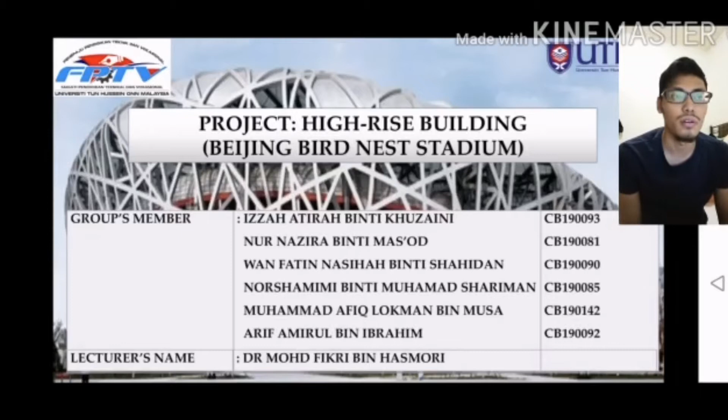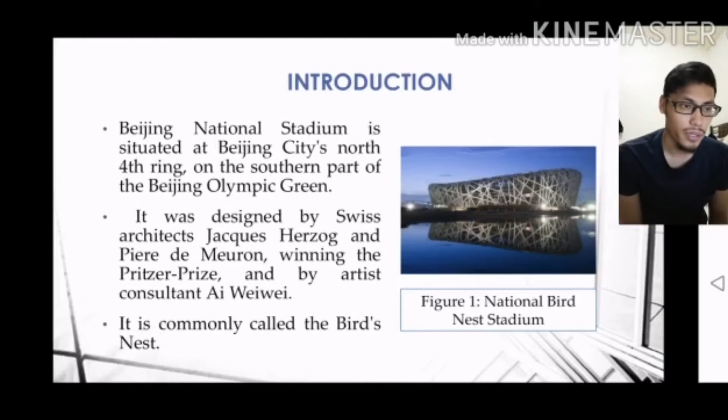So I will continue my next slide about introduction for Bird Nest Stadium, Beijing. Beijing National Stadium is situated at Beijing City's North Fourth Ring on the southern part of the Beijing Olympic Green. It was designed by Swiss architects Jacques Herzog and Pierre de Meuron, winning the Pritzker Prize, and by artist consultant Ai Weiwei. It is commonly called the Bird Nest.

Foundation system: the structure consumed thousands of tons of concrete and steel. The weight of the stadium was 110,000 tons of steel, considered as dead load. This building is supported on 38 meters of piling capable of supporting the horizontal force of the structure below the ground. The structure must be capable of resisting a vertical load totaling 56,625 tons.

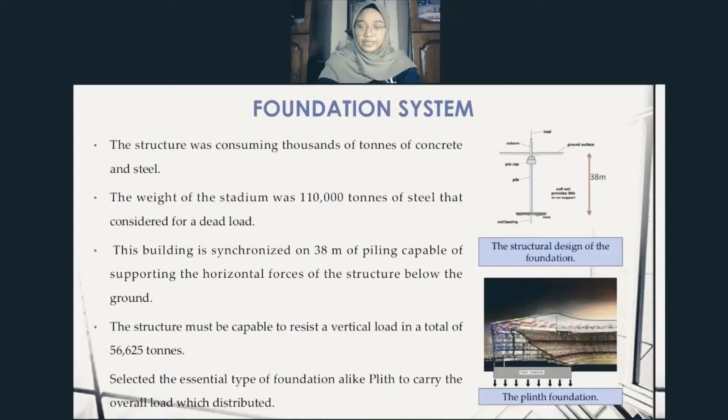We selected a plinth foundation as the essential foundation type to carry the overall load, which distributes it. The figures show the structural design of the foundation and the plinth foundation. This stadium used cast-in-situ bore pile, the most economical foundation capable of transferring high loads through the soil to deeper, more competent soil or rock stratum.

To suit the nature of the soil, the appropriate drilling tool is selected to excavate the soil on site where ground conditions are unfavorable. For the construction of bored cast-in-situ piles: first, set up and locate the pile point on the ground; second, the boring process; third, reinforcement placement; fourth, bored cast-in-situ pile concreting.

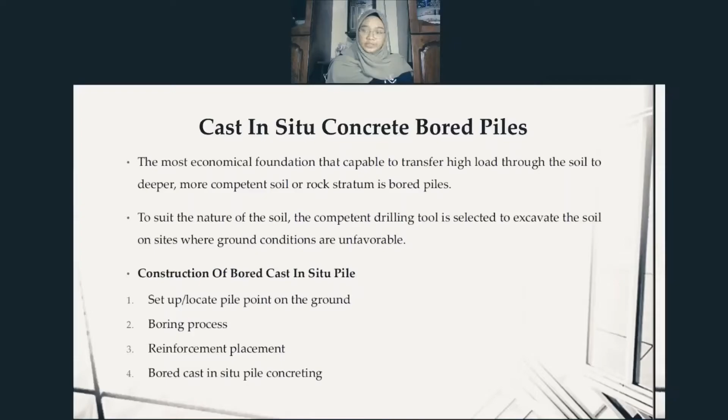Deep excavation: first is the diaphragm wall. The geometry of the primary elements forms a relationship between the supporting elements, points at ground level, and the opening roof's position, size, and shape.

The moving roof was eventually eliminated from the design, and the opening size became bigger and more closely corresponded to the seating bowl. The primary geometry was then developed into a 3D portalized space truss, enabling the roof to closely follow the architectural form of the bowl and concourse structure, rising to 60 meters and spanning the required 313 by 266 meters.

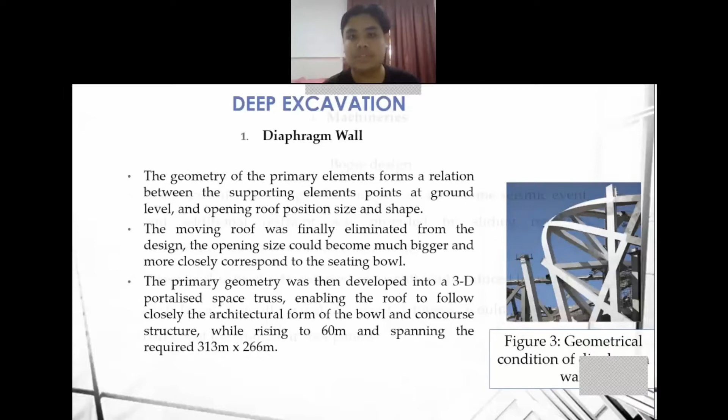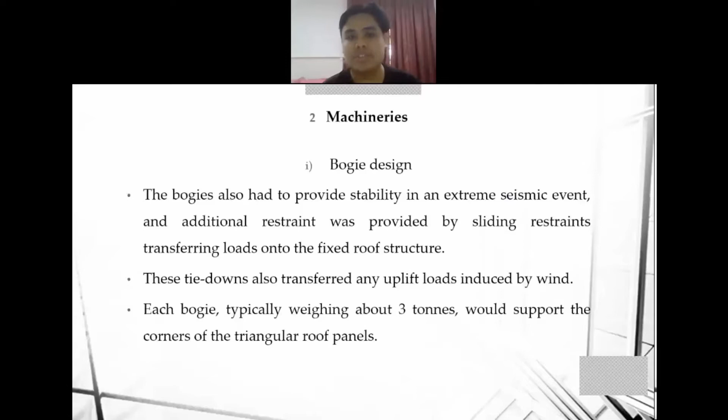The second element is the machinery. They used a bogie design. The bogies also provide stability against extreme seismic events, with additional restraint provided by sliding restraints transferring loads into the fixed roof structure. These tie-downs also transferred any uplift load induced by wind. Each bogie, typically weighing about 3 tons, would support the corners of the triangular roof panels.

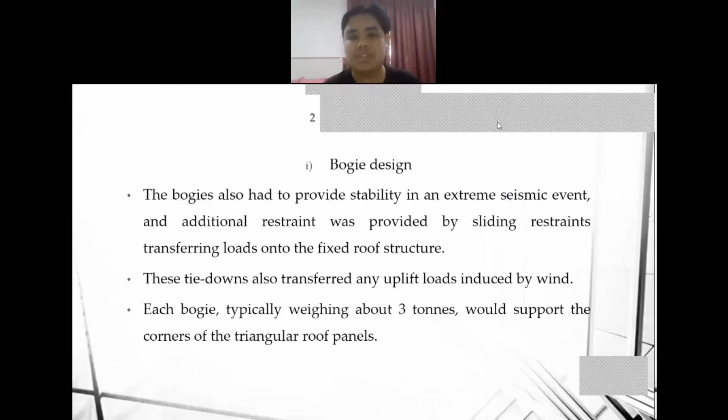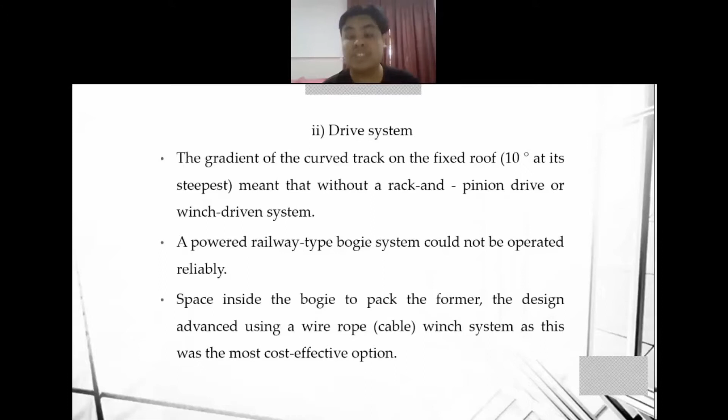Drive system: the gradient of the curved track on the fixed roof is 10 degrees at its steepest, meaning that without a rack and pinion drive or winch-driven system, a power railway-type bogie system could not be operated reliably. Given the limited space inside the bogie, the design advanced using a wire rope cable system, as this was the most cost-effective option.

Structural frame system: it is constructed with two independent structures - the first is the reinforced concrete seating bowl, and the second is the outer steel frame. The outer steel frame is constructed with a steel lattice structure, with a distance around this structure of 50 feet.

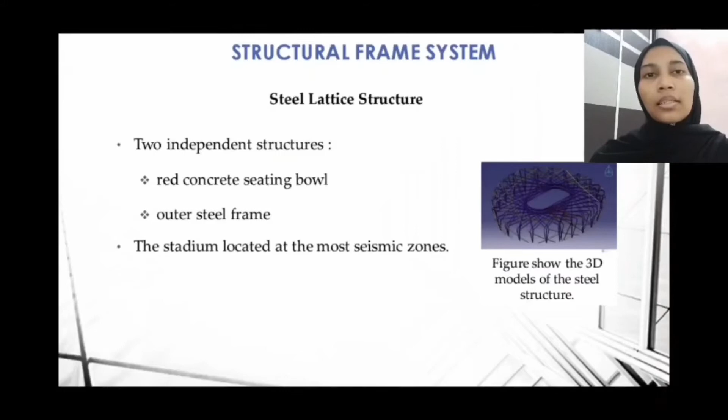The concrete bowl is the stand that holds spectators, located within the bowl. It is constructed as 8 different zones, each with their own stability system. Third, it uses precast concrete, so we can minimize the use of formwork. The figure shows the view of the stadium.

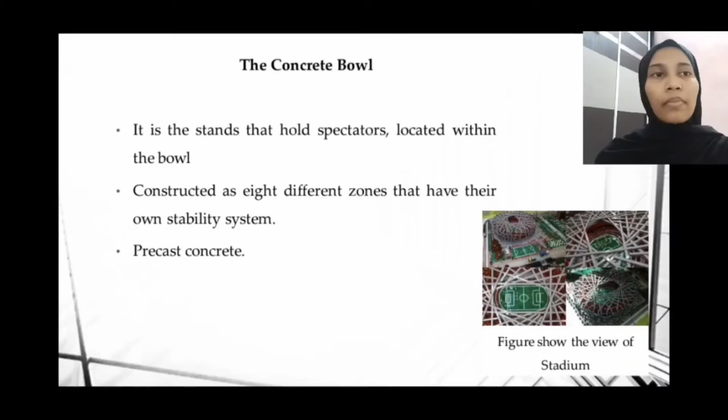For the roof, the upper part uses a double-layer membrane structure of transparent ETFE. For the lower part, translucent PTFE membrane is fitted on it, and it is also attached to the side of the inner ring.

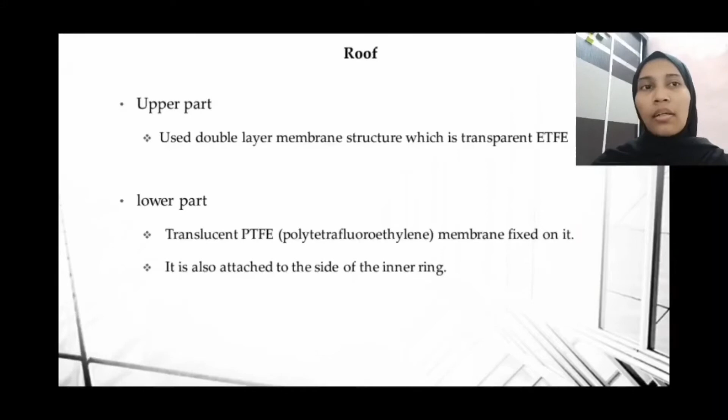Formwork system for installation of steel structure: the curved steel frames were constructed beforehand, then assembled on site, and the entire interconnected steel structure sections were welded together. The steel structure was supported by 176 hydraulic jacks during its construction.

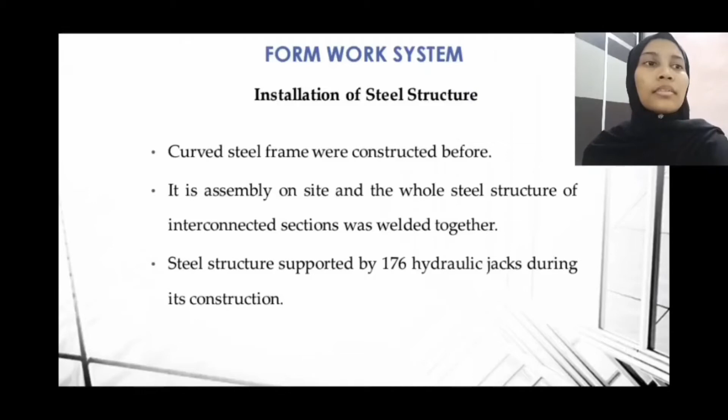Removal of steel columns: the structure stood on 78 supporting steel columns. To get rid of the columns, hydraulic jacks were used. First, the jacks would support the roof, then the columns would be removed, and the load would transfer to the jacks, allowing the structure to support its own weight.

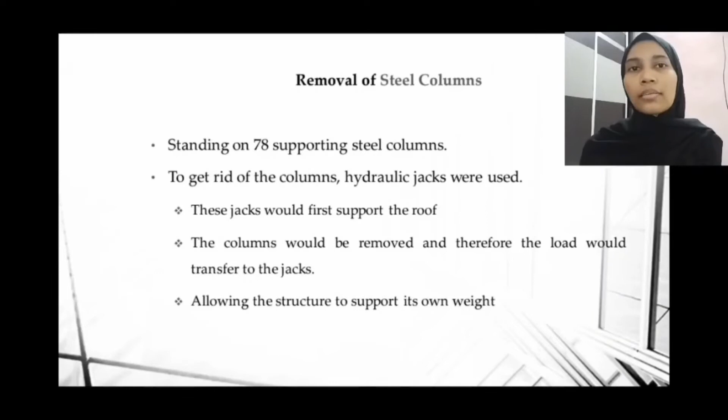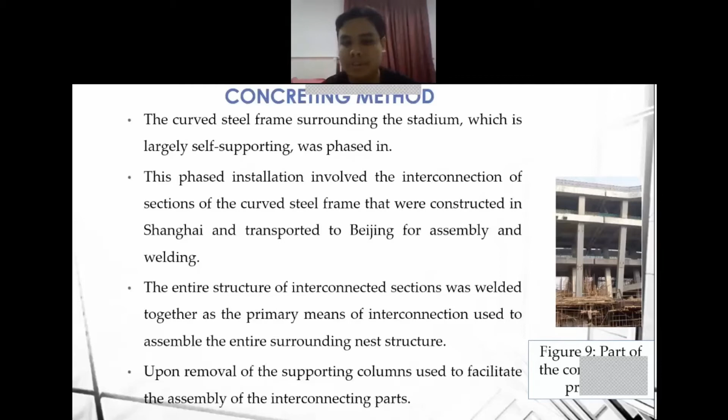Concreting method: the curved steel frame surrounding the stadium, which is largely self-supporting, was installed in phases. This phased installation involved interconnecting sections of the curved steel frame that were constructed in Shanghai and transported to Beijing for assembly and welding. The entire structure of interconnected sections was welded together as the primary means of assembling the surrounding structure, with removal of supporting columns used to facilitate assembly of the interconnecting parts.

The challenges and problems included the unusual structural form, technical limitations, and the capability of the company, along with the very long span of 313 meters, which caused the seismic design to differ significantly from that of typical tall buildings in several ways.

The Bird's Nest Stadium structure's seismic design measures that normally meet the collapse prevention goal for tall buildings under the level 3 earthquake, such as limiting inter-story drift and detailing for ductility, were inadequate.

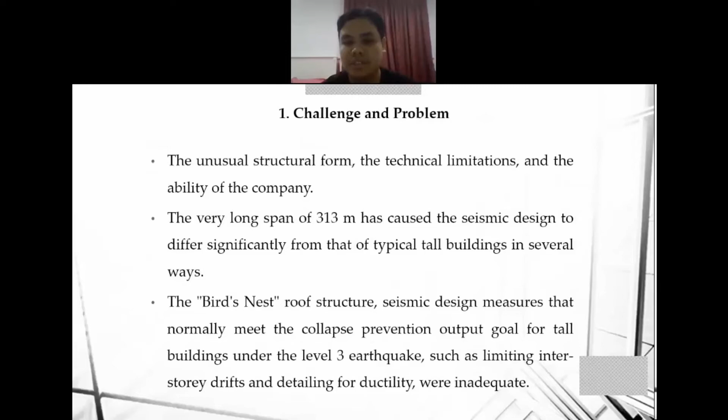Facade: this stadium has a gross volume of 3 million cubic meters and is considered the world's largest enclosed space, according to the Arup Journal. The architect has created an open facade surface to allow for natural ventilation and lighting, which is the most important aspect of the stadium's sustainable design. The facade's external surface has an inclination of approximately 13 degrees to the vertical.

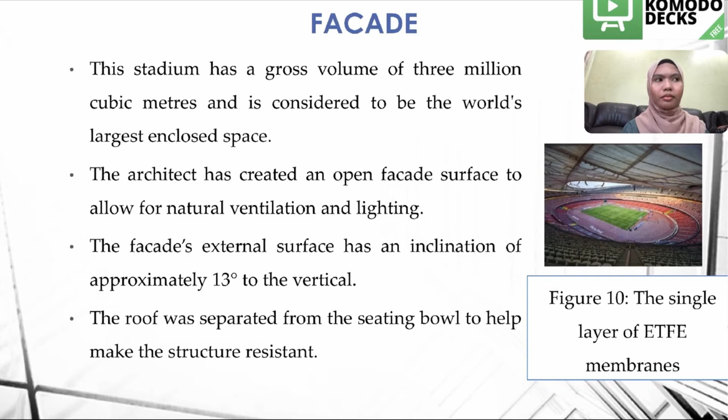The roof was separated from the seating bowl to help make the structure resistant and safe, because we know China is highly vulnerable to earthquakes.

This is wind load engineering. Rules of the International Association of Athletics Federations (IAAF) competition stipulate that information about wind speed must be available for athletics records up to and including 200 meter, long jump and triple jump. Unless the wind speed behind the runner averages more than 2 meters per second in the direction of running, the record will not be acknowledged. Measurements were therefore also made of wind speeds around the tracks, and the results presented as the percentage of time that gust wind would exceed 2 meters per second on the track, notably in the sprint and horizontal jump areas.

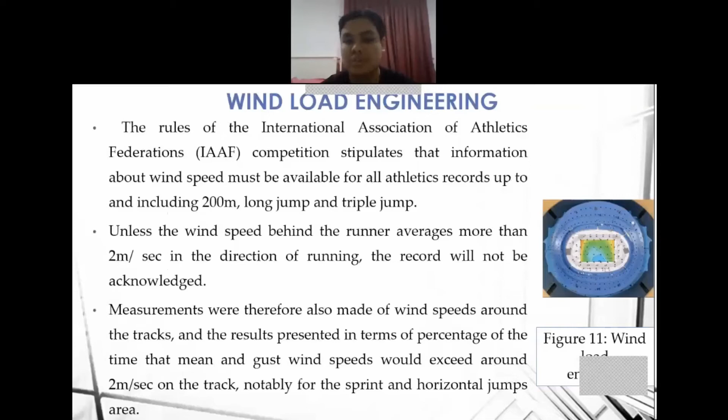Seismic load engineering is an essential design of earthquake engineering that should be used in building structures surrounded by some of the deadliest fault lines, in seismic design. The design proved that it greatly reduced damage, prevented collapse, and will also support the structure frame if the worst case concrete failure were to happen.

Third, each part of the structure was isolated so that it could move flexibly and independently during an earthquake. The structure will easily absorb the energy through its free movement rather than being broken into pieces by the earth tremor.

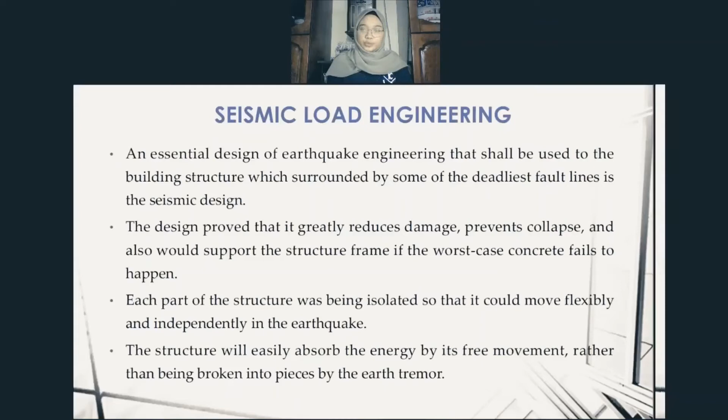For the seismic load of Birdnest Stadium in Beijing, China: the stadium was located in one of the world's most seismic zones, and advanced seismic analysis was undertaken to test the structure under various earthquake loading conditions. It is supported on a single continuous foundation system.

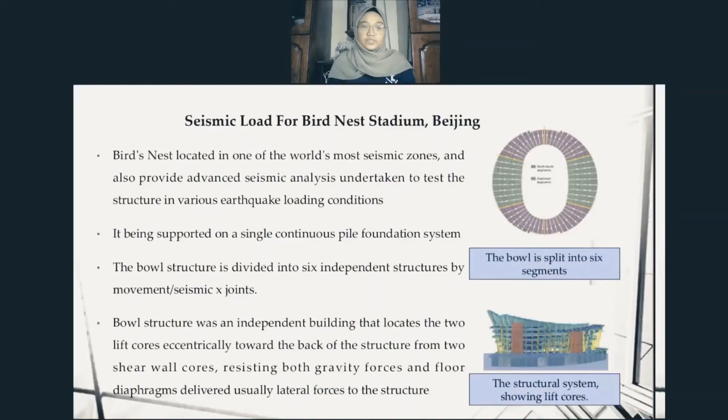The whole structure is divided into 6 independent structures by movement joints. Each was an independent building that located 2 lift cores eccentrically toward the back of the structure, with 2 shear wall cores resisting both gravity force and diaphragm-delivered lateral force to the structure.

Method of construction. First, material: 176 water-driven jacks bolstered the steel structure during its erection, while the structure was not equipped for self-support. With a precision of 1mm, the crane was fit for holding 300 tons. The water-driven jacks were released without delay to check the solidness of the arena's structure.

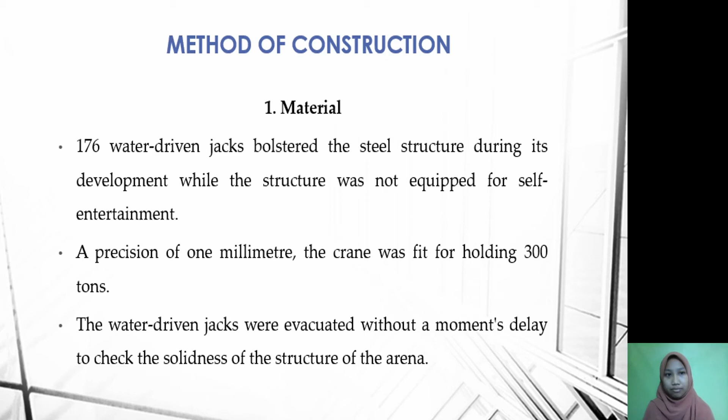Second, hoist and crane position. Steel bars were raised by 8 cranes more than 300 feet tall, lifting metal pieces as heavy as 350 tons to shape the cross-section of joined steel.

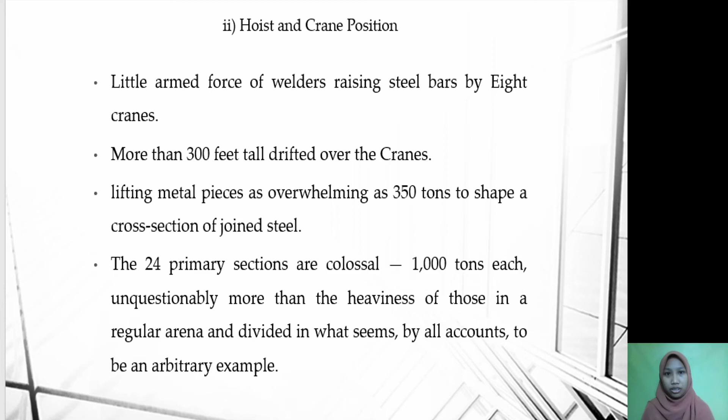Loading condition analysis and consideration. The stadium's loads mainly include the stadium's maximum occupancy of 91,000 people for the super-load. Dead loads considered during design include the burden of the roof structure, which is 42,000 metric tons. The total weight of the stadium is 110,000 metric tons.

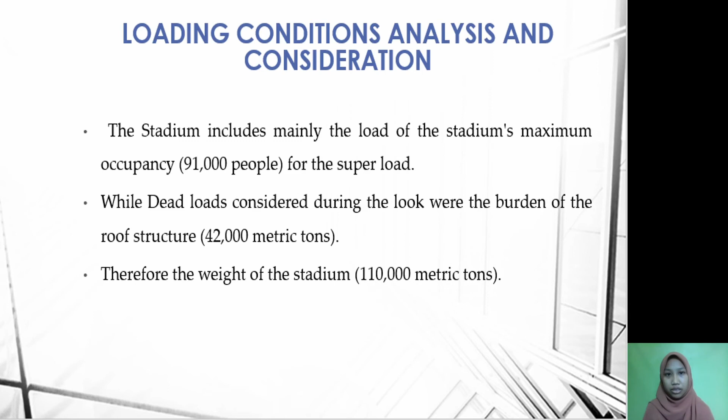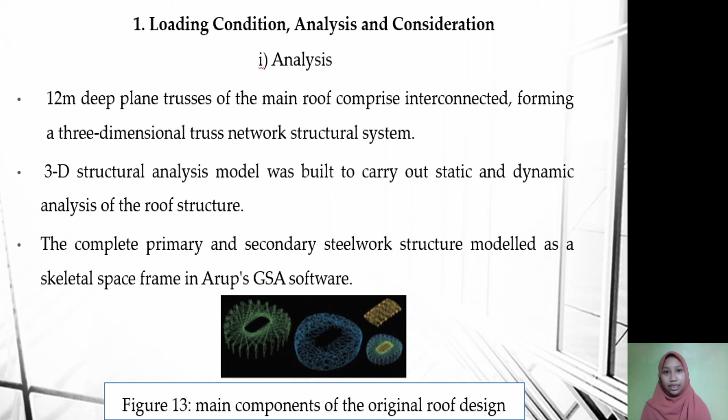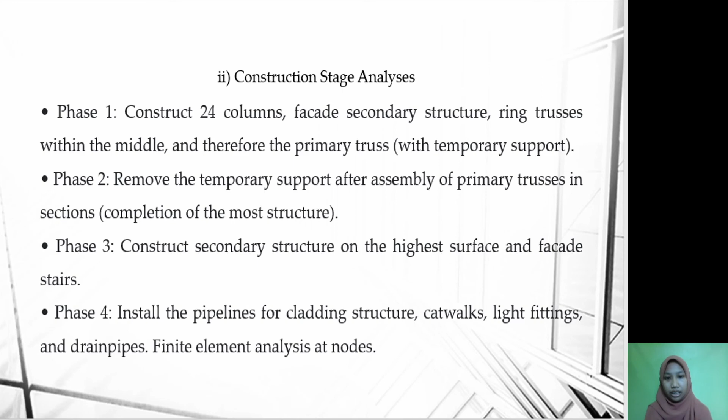Next is fire safety. As we know, the stadium is a steel structure. However, the stability of the steel decreases dramatically when temperature rises to a certain degree. So, all the seats at the upper end of the stadium are made of incombustible material, so that when a fire starts, the surface temperature of the steel will not reach 200 centigrade degrees.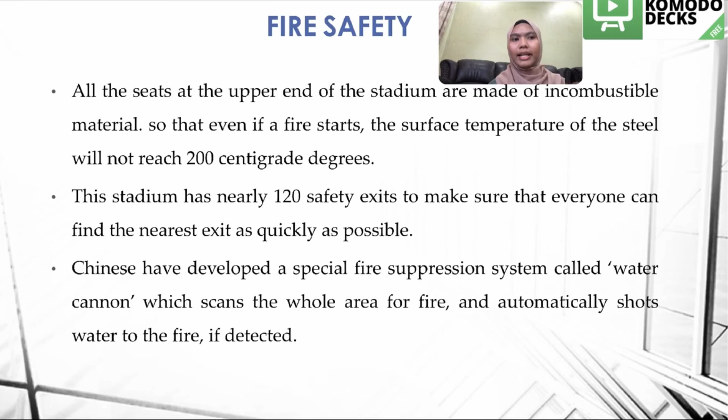This stadium also has nearly 120 safety exits to make sure that everyone can find the nearest exit as quickly as possible. The Chinese also developed a special fire suppression system called the water cannon, which scans the entire arena for fire and automatically shoots water at it if detected.

Service distribution. First, the rainwater recycling system: the National Stadium's modern water reusing framework utilizes underground pools that handle up to 100 tons of water per hour, 80 tons of which can be used for irrigating, firefighting, and cleaning in a coordinated way to lower the stadium's water utilization.

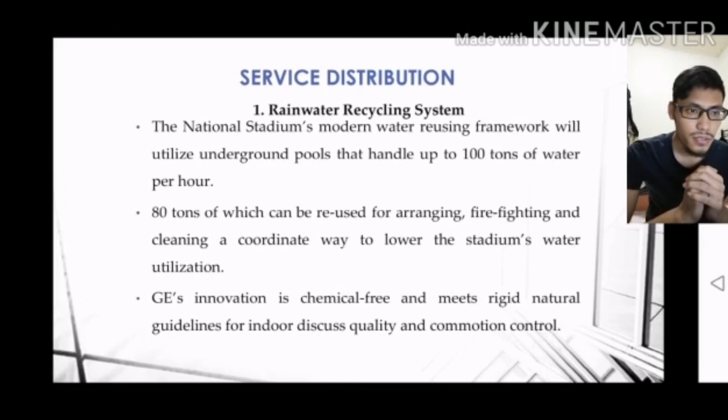This innovation is chemical-free and meets rigid natural guidelines for indoor air quality and noise controls.

Next, second: development of a multi-type wireless sensor network for the large-scale structure of the National Stadium in China. A multi-sort wireless sensor network (WSN) for structural health monitoring is created for the National Stadium in China, generally known as the Bird's Nest.

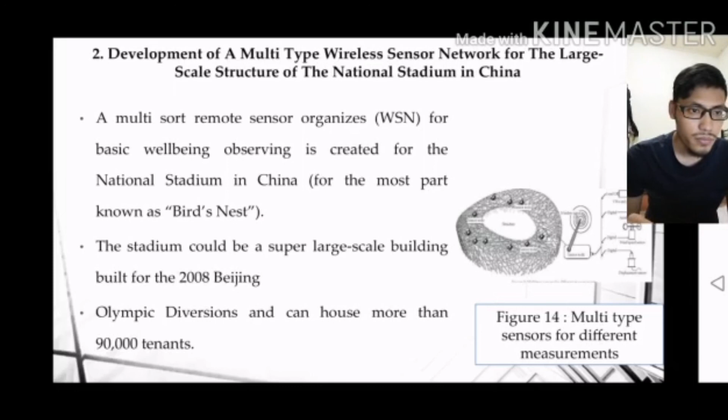The stadium is a super large-scale building built for the 2008 Beijing Olympic Diversions and can host more than 90,000 tenants.